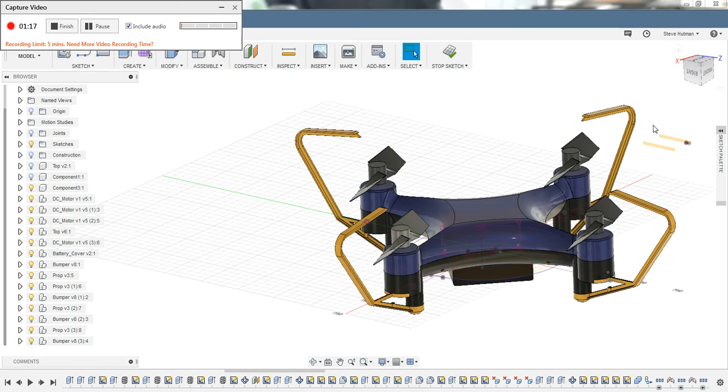So at any rate, let's take a look at the motion study now. As you can see, the propellers are all spinning in unison, and they are all, yes, clearing the bumpers on the sides. So we can play that again, check it out.

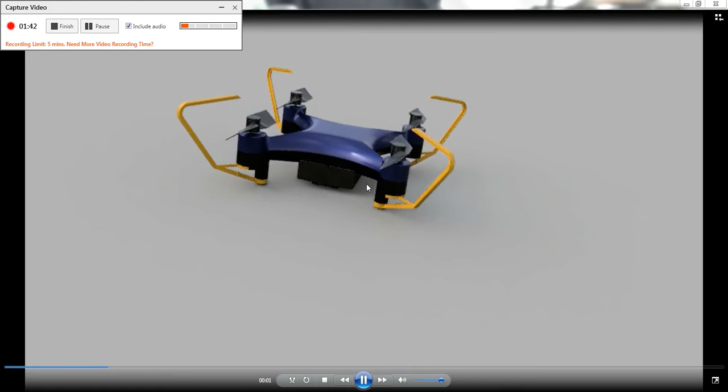I'd like to next discuss the tolerances of my drone. So let me remove the top, and let's take a look first at my motors here. As you can hopefully see, there's a little bit of gap around the motor where the motor sits into its mount or its cylinder here, and the ID of the motor cylinder or the mount here is 29.78 millimeters, and the overall diameter of the motor 27.5. That leaves you about a millimeter on each side.

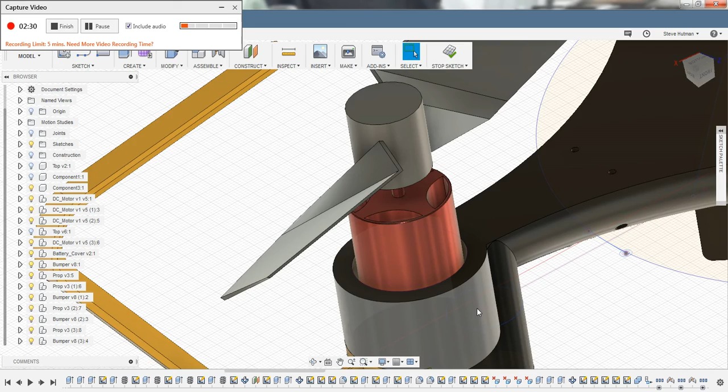The reason for that is this motor is inevitably going to produce heat, and I know that the heat needs to escape, and there will also be a gap around the motor shaft up top to allow that heat to hopefully escape through. And the reason there is such a great amount of clearance is the motor does not press fit in. It is held in by screws on the bottom.

So now at any rate, in opposition to this is the propeller, which, like most DC hobby motors, the propeller normally press fits into place. So therefore the ID of the propeller hole is 3.17 millimeters, and the OD of the motor shaft is also 3.17 millimeters. And with a slight press fit, this thing should not go anywhere.

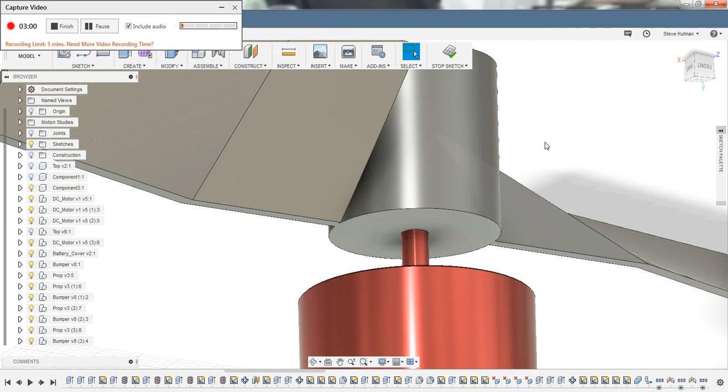Now, the battery cover, which is a very basic design, and it looks a lot like battery covers probably found on many of your remote controls for your televisions, or even your calculators, or your drones that you may own. Up top, there's a tab here that you will push down on, and with a slight interference fit, it will drag out.

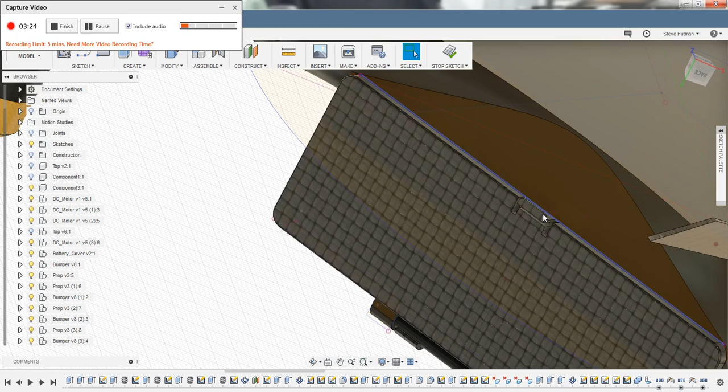And then at the bottom here on the hinge, now the hinge shaft is 2.5 millimeters in diameter, and the inside diameter of the actual hinge itself here is 2.5 millimeters in diameter. So slight interference fit, and it should snap into place, being that this is plastic. Okay, this hinge should flex, and once it's in place, because of its C shape, it will not fall off.

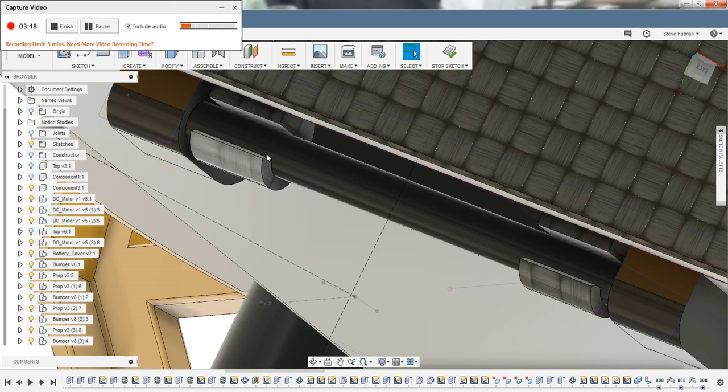So now I'd like to talk about, I guess, the pride and joy of my design, which will hopefully keep someone from destroying this thing, which is the bumper. The bumper now, this part here is the landing gear, and this will simply fit flush up against this cylinder here and screw into place up through the bottom.

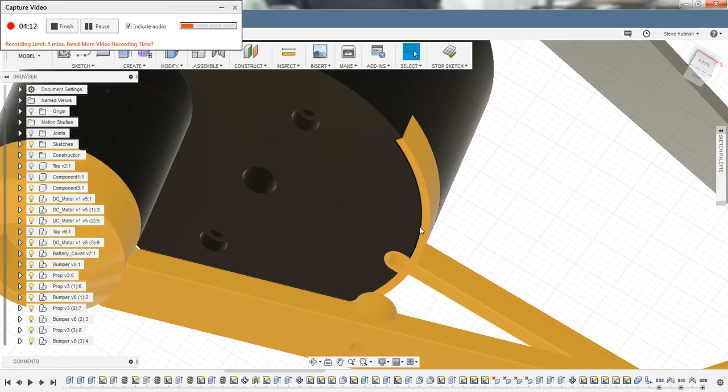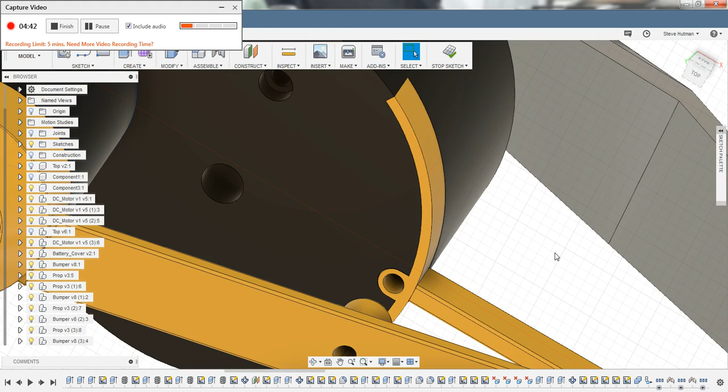Now, right here is where there is no gap along this C-shaped part here. There's no interference there. There is, however, some interference here in this cylinder. The OD of the mounting screw cylinder for the motor mount cylinder, this overall diameter across here, is 2.991 millimeters, and the ID of the receiver part of this is 2.984. So there is a slight interference fit there, and then of course a screw will go up through the bottom, fastening that into place.

I hope you've enjoyed checking out my Razor drone design. I think it is a nice sleek design. And with the top back on, there it is.